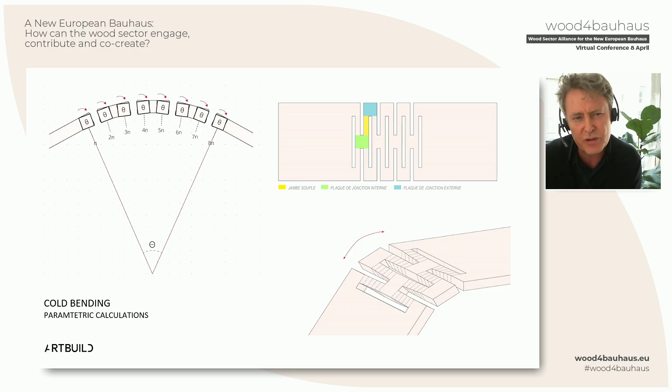When you look at these elements very closely, you realize that there is actually a particular engineering calculation to be done on each one of those torsion modules of wood. If you can find the right parametric calculation, you can apply that to different types of wood and different scales of CLT panels. And that's what we started to do. We started to find out where we could find the tools to do this with CLT panels.

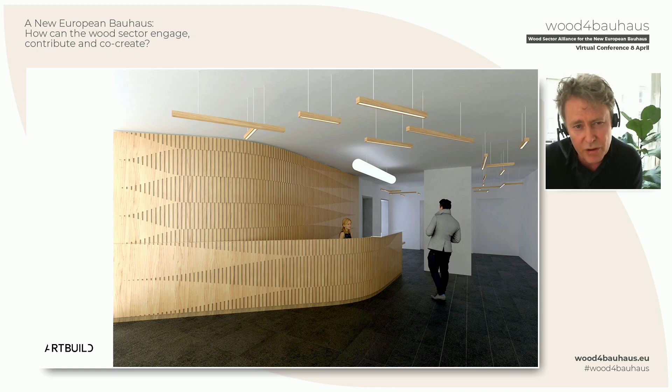So this is not plywood and small woods. These are big CLT panels. These are floor slabs and load-bearing structures. That was quite successful. We began to find that there was a nice balance between 6 centimeter thick panels and the parametric tunings. We did our first experiment, which was in fact the welcome structure in this building, which you saw, which was handed over in 2017. But we thought, okay, now get this bigger, get this scaled up.

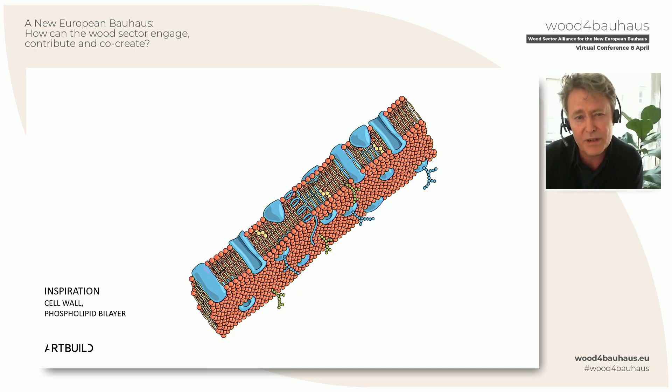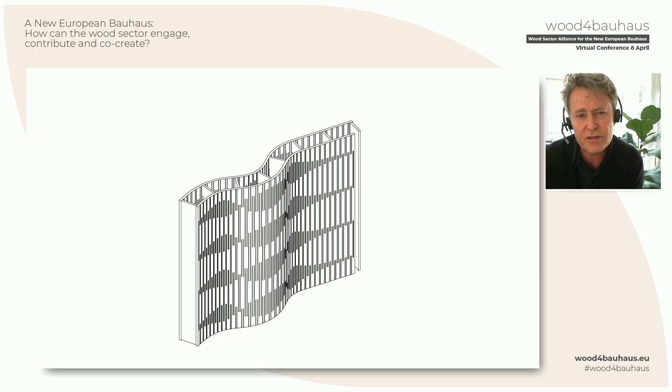To look at structural systems, what can we do once we've got that curved CLT panels? We went back to nature and we found a double wall structure. We started to work with, rather than a simple load-bearing element, we started to combine these 6 centimeter panels, and with the precision of our numerical tools and our calculations, we started to make these walls, which, being cut in a particular way, according to this parametric tool, could make us some wonderful, wonderful load-bearing elements with an awful lot of freedom from a plastic point of view of what we can actually do to make things which are totally,

totally different. Hollow cavity, so you can carry fluids, you can put insulation in, you can put thermal inertia, and we came up with a whole new constructive system, or at least we thought. Then we were looking for opportunities to what to do next with this structure, how to then take this beyond.

And I'm afraid I can't see, this is such a small thing on my screen, and I can't even read what that is on the slide. So somebody could please pull up the screen, that would be really helpful. There we go, thank you. That's wonderful. That's great.

Okay, so this is just a recap. What's interesting in this lattice hinge kerfing approach? This is reversible bending. So basically, you're taking your elements, you're slicing them up, you can flat pack them again. That makes for flat, efficient transportation. The digital tools give you an incredible engineering flexibility in terms of what you can do and how you can recompose these elements and put them together again. Custom bending, that means you can pretty much design them to any shape that you want.

There is this upcycling, so we're back to some of these words that we heard together today, the cascade, which I also think is a lovely, lovely term. And then you've got the acoustic, biophilic, and aesthetic qualities of timber. So you're combining a bunch of things, qualities of timber all together, and you're addressing this problem of reducing the redundancy of the buildings.

We were then commissioned to design a welcome pavilion for the agricultural fair in Belgium, in the Walloon region of Belgium. And we thought, well, let's use the CLT bending process. And we started to think, well, what in nature can we be inspired by in order to come up with a constructive system which is going to give us the particular form or the particular use that we're looking for? We looked at slow growth patterns.

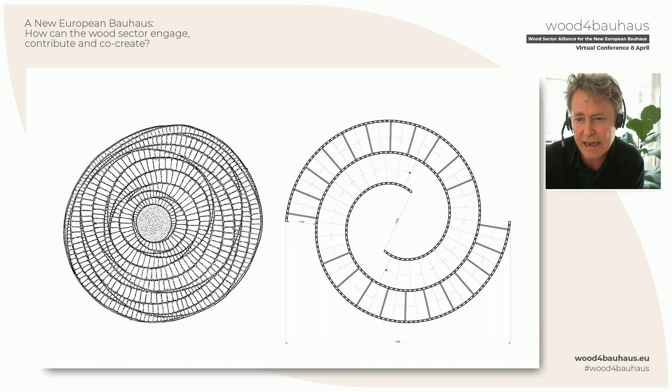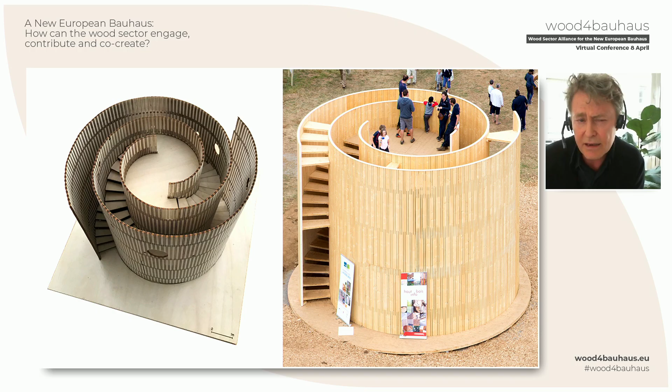So as we look closer at the section through the nautilus, we begin to understand how the whole thing works together. We start modeling that up using our CLT 6 centimeter panels, and how we're going to cut them in order to form those concentric spirals. We start doing our first models, our first real wooden models. And then that's the thing once it's built. So obviously I'm jumping through some steps very, very fast, but that was the welcome pavilion in its final state.

That's Sasha. She is our parametric priestess. She's the one who did all the coding for this. And you can see her soaking up the biophilic elements of the wood. I also heard this wonderful term, acoustics, the Helmholtz resonator. I think this is one big Helmholtz resonator that we built here.

But it was just magnificent, because this is when architecture comes back and tells you how beautiful, simple things can be. These basic construction elements, CLT, this is unsanded CLT. It's just been cut with a circular saw, and it makes for these cathedral-like spaces. It's absolutely gorgeous. So we were convinced that we could then go on and do even more things with this. This is the opening ceremony. In fact, it was rather like a musical instrument rather than the musical instruments being on the outside.

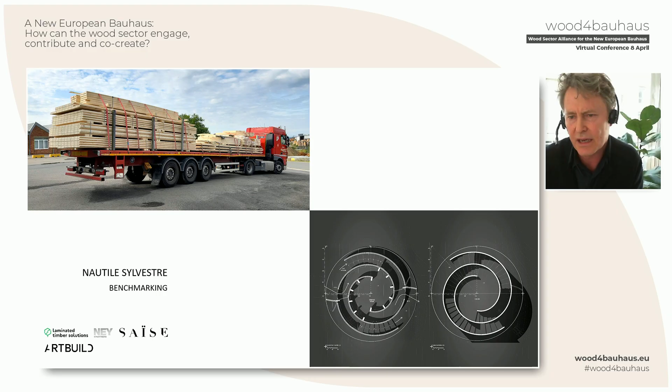We did some benchmarking on this. That's the entire pavilion being transported. So that's the flat pack element. Then we're trying to find out how structurally we're able to compare with simple post and beam and wooden frame, stud frame structures. So we need to do that homework as well. That's in progress at the moment.

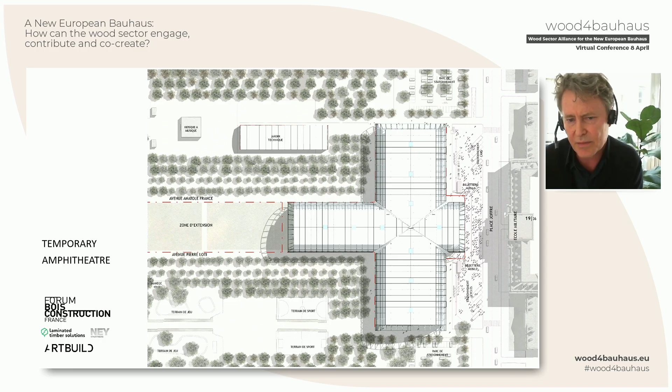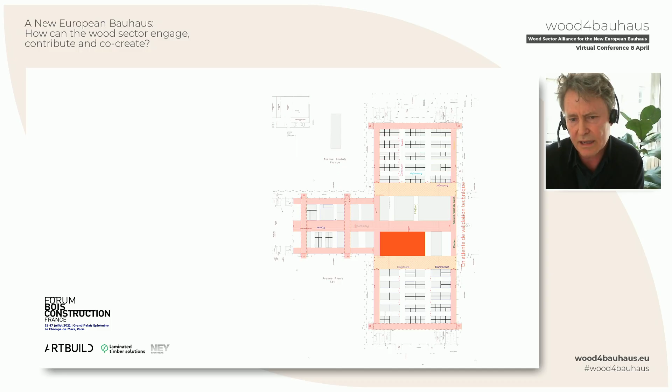But then, of course, this commission came for the subject of today's talk. So I'm just going to go to that very, very quickly. This is the Grand Palais Éphémère. This is where the Forum Bois Construction, one of the biggest meetups of the timber industry in Europe, happens. This will be happening this summer. And this is where we were asked to do the temporary amphitheatre, which is sort of like the heart and soul. This is where all of the exchanges are made and all the speakers do their talks. And that was basically the rectangle that we were given.

We had a look at how we could basically provide a structure which would give us the acoustic comfort and the protection from all of what's going on around, the noise of the fair going on around. And we came up with the conception of this rectangle using a series of curved panels.

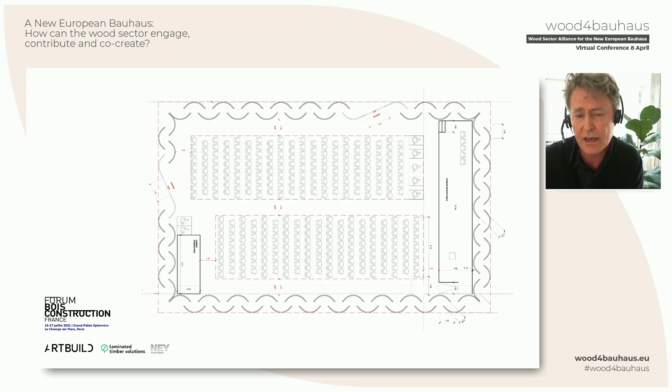The next question was, how big should the curved panels be and how will they stand up? Because we're obviously not going to be using the banana stem configuration. We have to find something else. When we look at the panels all standing up to make the rectangle, that's what it starts to look like. It's rather like a curtain in wood, but this is 6 centimeter CLT. How do we get all of that to stand up?

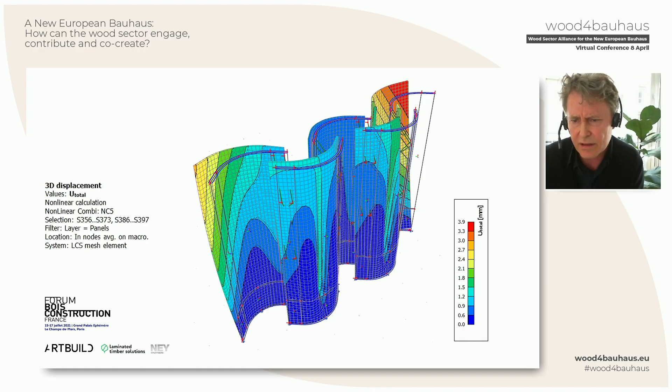Well, then we go back to our engineers, Ney, the Belgian engineers. They're a wonderful, wonderful firm, extremely good with timber. How do we get all this to stand up? Well, we went back to nature again. This is how the panels would perform if you just sort of hold them on the ground and then let them go. So this is all the pre-engineering work that we're looking at in order to calculate what to do.

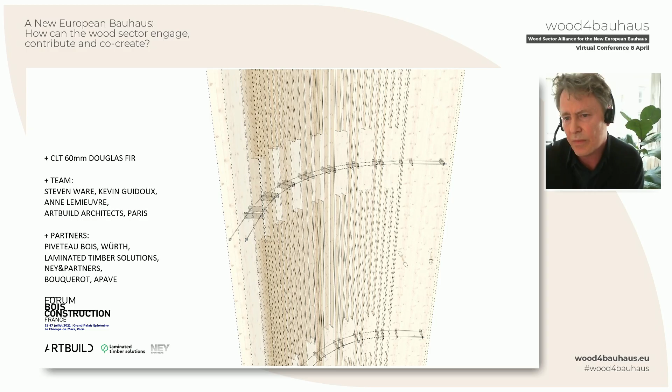We looked at another system which you find in nature, which is bird bones. Very, very light, very, very strong. Not the concentric circle model that we saw a bit earlier, which is more of the human bone thing, which is made to carry weight. Bird bones, when we looked at them closer, we found a whole bunch of different structural approaches, and we started to apply those.

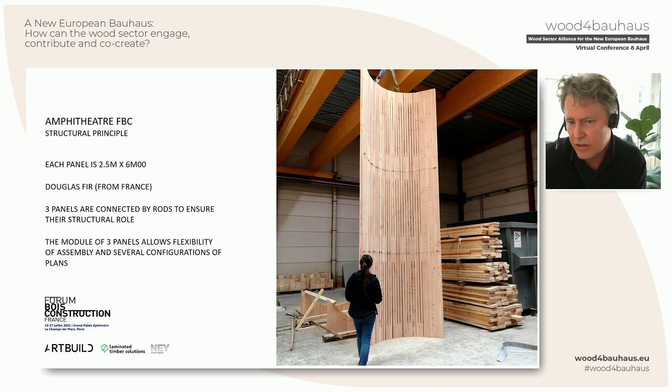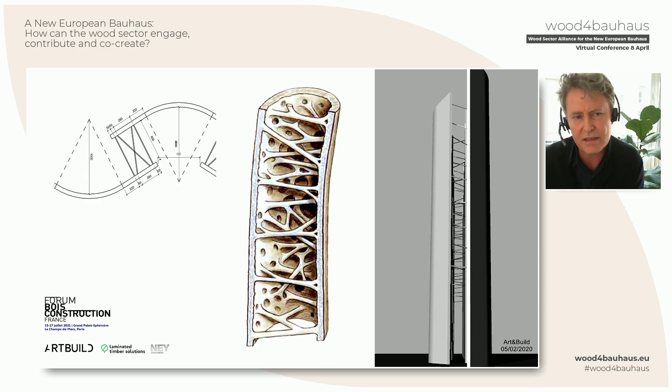They can resist the wind loads, they can reduce any impacts that they may be subjected to during the course of the fair. That's looking at sort of a down section, at how they're all put together. And this is basically what the amphitheatre is going to look like if you are able to come, and let's hope that everybody's able to be mobile again this summer. This is what it'll look like in the Grand Palais Éphémère this summer once it's constructed.

So all of these elements are now being assembled right now in the workshops, and they'll be transported to site. They'll be bent on site and then pinned together on site. What's going to become of this temporary pavilion? Because once again, we're building to disassemble. Well, it's going to be shipped off and right now it's being studied as a food hall. It's going to become a food hall somewhere on the outskirts of Rennes, let's hope.

But again, there are more barriers to do with all of this than just simply engineering. There are also questions of insurance companies who say, well, I don't want used elements. And I think that as we start to develop more and more approaches which integrate circular economy principles, the more we're going to have to deal with another set of barriers. We've dealt with the termites, with the fire, with the seismic things. Now we're going to have to deal with a whole bunch of other elements, which is, can we reuse all of these elements in a structural way and satisfy our clients who are taking on something which has already had a previous life, but we're absolutely committed to going all the way with that.

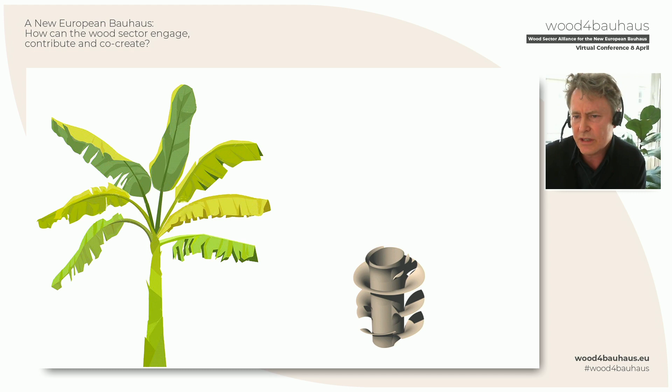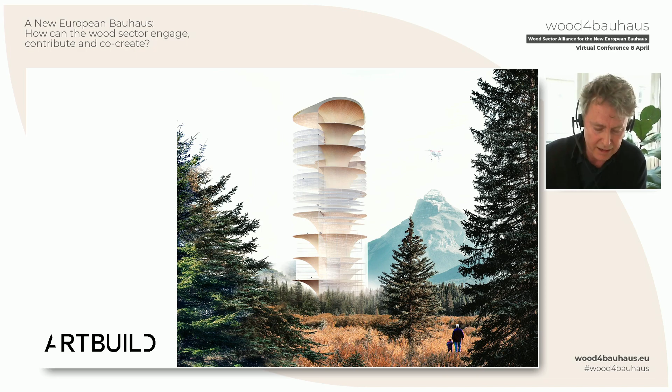So this Musa project, this research project, which you've now seen some of the flowers that have come out of it, has really become for the office almost an existential idea. Where should we be going with constructing? Should we be building things? Or should we be completely rethinking the way in which we inhabit the planet? Should we be aspiring to leave the ground, to build high, not to reach the skies, but to release the ground to other species who need to be on the ground?

Should we be living in structures which offer us more than just a view to the exterior? And should we be borrowing more materials from nature and geological cycles and using them for our own purposes and then releasing them back to nature? How do we do that? And can we imagine streamlined manufacturing flows using cold processes, which is what nature uses as well, or body temperature at the very most, just as our cells manufacture molecules which build the building blocks of life themselves. So this is where we're going with the Musa project, and perhaps one day we'll be able to do much more ambitious things with this technique.